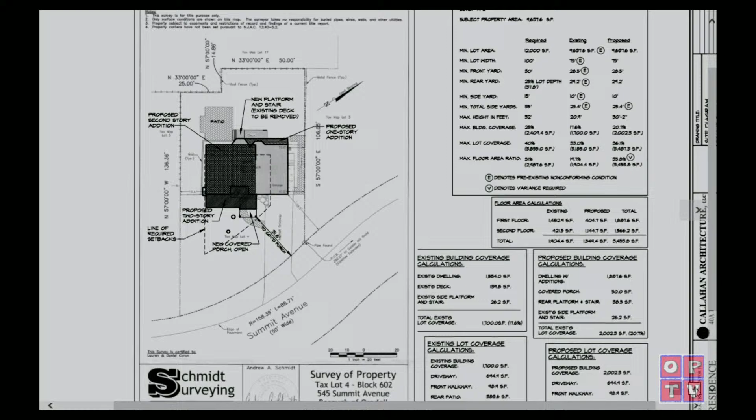The first, and probably most important, is that the lot is deficient in lot area. In the R2 zone, 12,000 square feet is required; this lot has 9,637 square feet. The existing lot is 75 feet wide, where 100 feet is the minimum lot width.

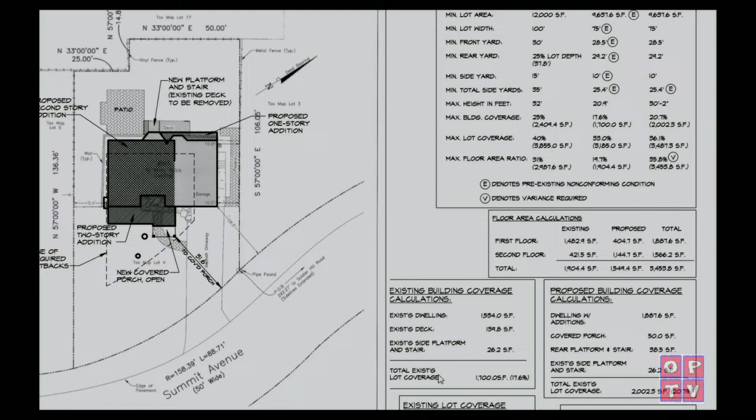There's a zoning chart on the A1 sheet of the submitted plans that flags all the existing nonconformities. The existing front yard setback is 28.5 feet, where 30 feet is the minimum required. The existing rear setback is 29.2 feet, where 37.8 is required. There's also side yard setback issues due to the lot width deficiency — the existing side yard is 10 feet where 15 feet is the minimum required, and the combined side yard is 25.4 feet where 35 feet is the minimum required combined side yard.

With that in mind, what we're trying to do is add on to this to make it a little more of a livable setup. Right now there are 2 bedrooms on the first floor, and on the second floor is a master suite. We're trying to provide a new second floor that has all 4 bedrooms with 2 bathrooms.

On the plans submitted, the A1 sheet has a site diagram showing where we are going, with the hatched-in portion showing the proposed second-story addition. To make this work and make the first floor more livable, we're going to pull the first floor towards the street about 8 feet, and that's going to be a 2-story addition at that part.

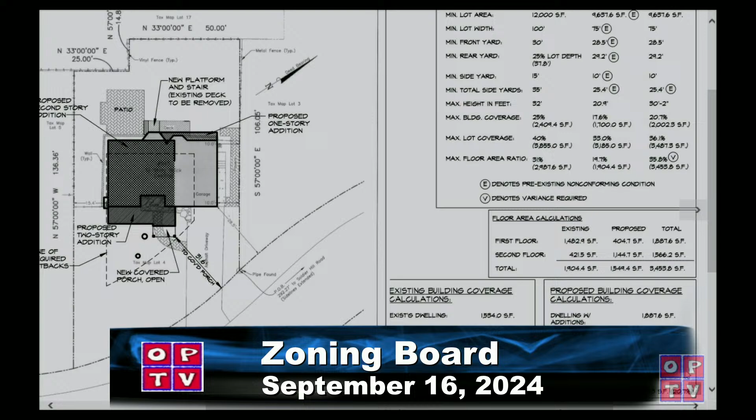On the site diagram, I have a dashed line that indicates where the required setbacks are. You can see that really the only place to build on this lot is in front of the existing house. So that's what we're proposing to do, and create a new facade and a new front to this house.

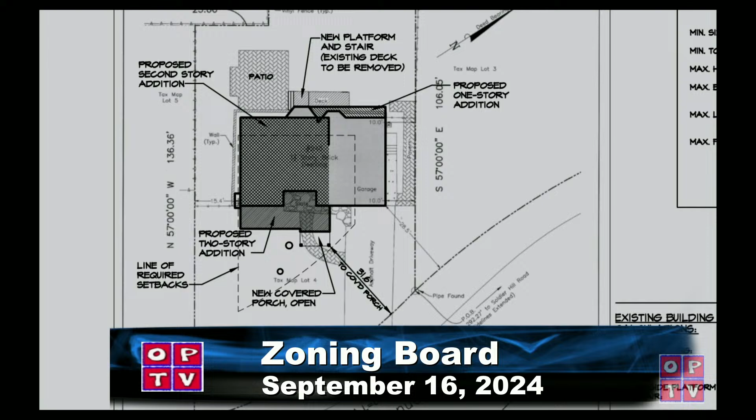Going through the plans, the A2 sheet shows the foundation plan — this house is on a crawl space. There was a small subsequent addition in the top right corner of A2, a previous addition that dug out a full basement behind the garage slab, but the balance of the house is on a crawl space, and the new addition would also be on a crawl space.

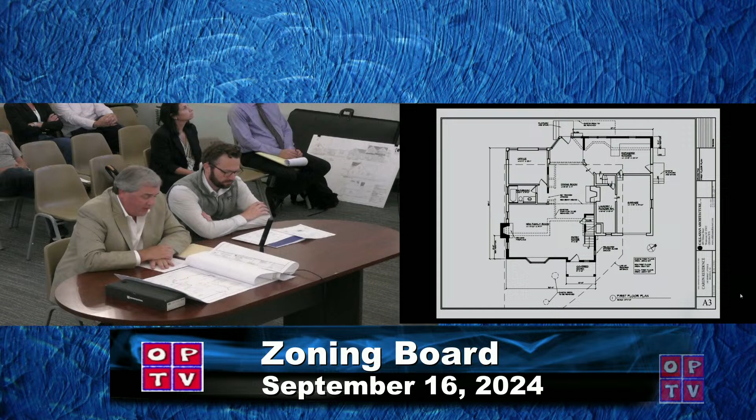A3 has the first floor plan. All the hatched walls are new. We'd be converting one of the rear bedrooms to an office space, taking out a closet, and opening up the first floor plan a bit more. Also, one deficiency in the house is the width of the existing kitchen, so one of the proposed additions is to add a little less than 4 feet off the back of the house to make the kitchen more usable and useful.

A4 is the proposed second floor plan. It shows the existing layout on the right-hand side, the rec room — that's the existing master suite right now, if you will. There's a back stair that leads to the kitchen, so the flow is not great. Part of this addition, and part of the square footage we're asking for, is to build a new stair in the new part to connect the new first floor to the new second floor.

A5 and A6 are the exterior elevations. The house is brick front now. The right side of it that is brick would maintain the brick, and we'd like to get some brick wainscot, hopefully using the brick from demo, to adorn the front facade as well. Those are the two exterior elevations, A5 and A6.

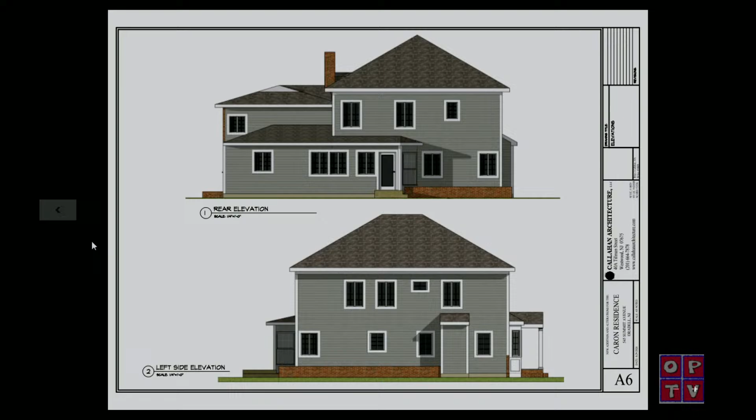So we are seeking the following variances. We have one for minimum combined side yards, 35 feet is required, and 25.4 is existing and proposed, so we're not increasing that degree of nonconformity. And the maximum floor area ratio is the second variance. In this zone, 31% is the maximum allowable, and we are proposing an FAR of 35.8%.

If this were a conforming lot of 12,000 square feet, that square footage we're proposing would equate to about 28.7% FAR. So in my professional opinion, it's a square footage that in this zone could easily occur on neighboring homes.

To sum it up, strict application of the zone provisions would result in practical difficulties in this case, in that the proposed second floor would have to be brought in, and we'd have to provide structure for that new second floor as opposed to building on the existing exterior wall. I'm talking specifically about the rear wall and rear yard setback. In addition, I think we're keeping within the scale of the two-story structures in the neighborhood and surrounding zone.

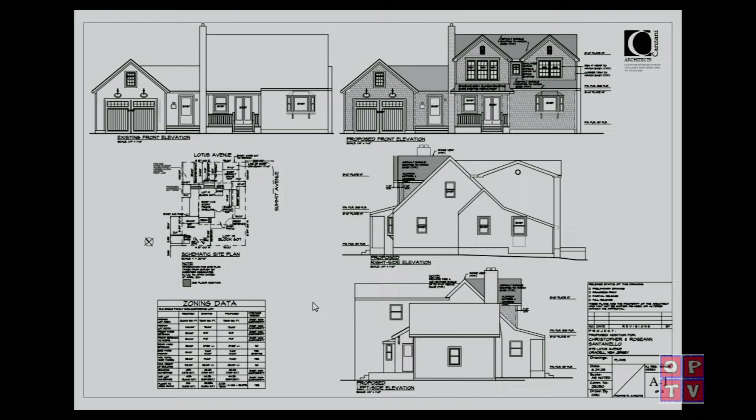One noticeably outdated feature, however, is the Cape Cod-style roofline that faces the street, showing a visually imbalanced ratio of roof to house. It also serves to create old-fashioned sloped ceilings encroaching on the 2 front bedrooms. We're proposing to add a dormer to the front of our house to modernize and add usability to our 2 front bedrooms. It will also update the appearance of the house with the front-facing gable look that is consistent with both new construction styles and renovations in the area. The variances we request to perform this addition are all entirely within the pre-existing, non-conforming boundaries of the house with regard to side yard setback, total side yard setback, front setback, building coverage, and impervious coverage. A slight exacerbation of our existing floor area ratio nonconformity would occur due to the leveling and squaring of the front bedroom ceilings and walls by the dormer.

Totaling only 78 square feet of additional space, the house will be no wider, deeper, or taller than it currently is, remaining entirely within its existing footprint on the property. The hardship created by an undersized lot in the R2 zone at 7,500 square feet, where 12,000 square feet is required, is entirely responsible for the need for these variances. And we believe the current footprint of the house and similar neighborhood homes show that the property can support these variances with no detriment to the area and no negative criteria.

During the careful planning of this request, we considered other alternatives. However, the next best options proved to be unfeasible. Building out over the garage to provide less cramped space in the bedrooms created a far greater FAR variance and much larger construction disturbance. And adding dog-ear style dormers actually diminished usability in the 2 front bedrooms because of the disturbance in contiguous wall space with no relief of the low ceilings. We feel this attractive dormer is the best option for ourselves and future owners of the home. The change would be in harmony with the neighborhood and add both value and visual appeal.

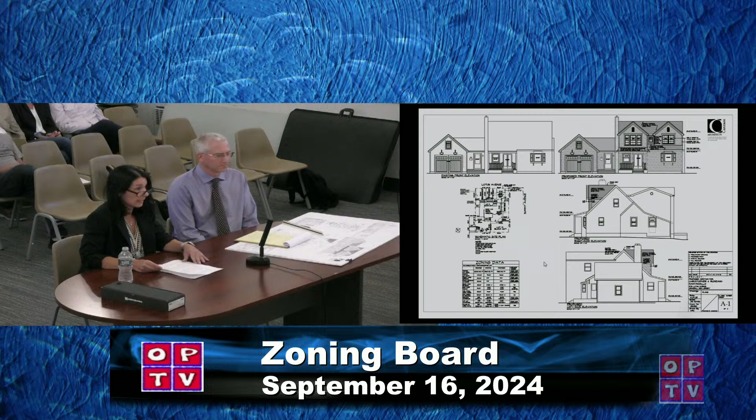With that, I'll ask our architect, Kevin Spink of Kanzani Architects, to cover specifics of the project and answer any technical questions you might have. Thank you. I believe she summed up the whole application. But you're going to bill her anyway.

I know, right? I'm here, I might as well do something.

Okay, just walking through the zoning on this. As we stated, it is an R2 single-family zone. It is known as 875 Lotus Ave, Lot 19, Block 607.

Currently, the existing property is undersized. It is 7,500 square feet, where 12,000 is required. The minimum lot width is supposed to be 100 feet, where we only have 75, so we're much narrower than what we were supposed to be.

Currently, the front yard setback measured - I just want to make sure I get it to the right spot - we are measuring 21.8 feet at the front yard, and that is to the front porch itself currently, where 30 feet is required.

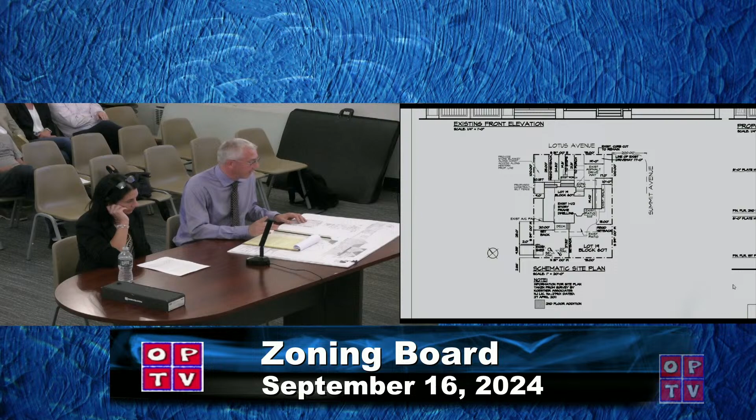The side yard setbacks - just making sure I get this right - where 15 is required, we have 9 on one side, and we have 10 on the other. So our total is 19 feet, where the total combined is supposed to be 35. So we're much smaller than what is supposed to be.

These are all pre-existing conditions. The height of the house is currently about 24 feet 9 inches, somewhere in there. We are maintaining that height as what it will be.

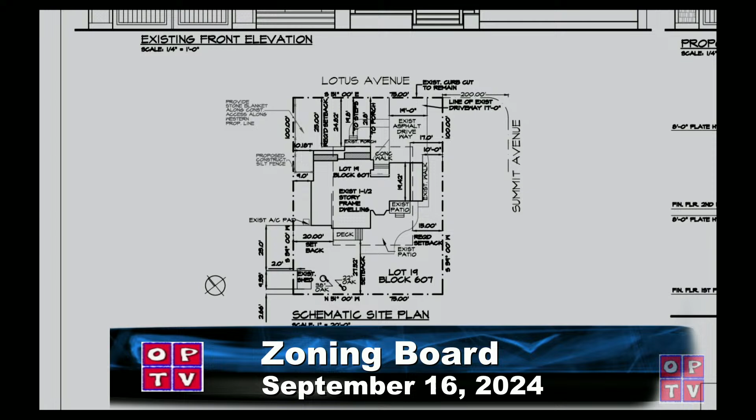The building coverage is supposed to be 25%. We are at 26.2 currently. The impervious coverage is 40% required, and we are at 44.2%. And the FAR is required to be 31%. We are at 35.33%.

As stated, what we're looking to do is just improve the front aesthetic quality of the house by adding 2 dormers to the front, basically, and pulling the 2 rooms out. We're only pulling them out 3 foot, or 2 foot 11 and a half and 3 foot 1 respectively on the 2 sides, and it creates that new look on the elevation. You can see the 2 gables, and it really accentuates the front and improves the overall aesthetic quality.

Overall, those 2 dormers are only adding 78 total square feet to the house. We are aligning them up to the side of the house that is currently existing, so our setbacks will remain at 9 feet, but we are technically exacerbating it by adding a second story over the top of it.

The same thing goes with the 2 side yard setback requirements. We are still identical to what is currently there. It's just exacerbating it because we are adding that second portion over the second floor.

Front yard, we are not increasing the front yard. We are actually stepping it back from the front of the current house. So we are respectively 1.5 feet and 2.5 feet back from where the current front of the house is.

So overall, it is the FAR. The FAR is going from 35.3% to 36.37%. We feel that the overall aesthetic quality is a significant improvement. The benefits outweigh the detriment of this, and we feel that this de minimis addition would be in kind with the neighborhood itself.

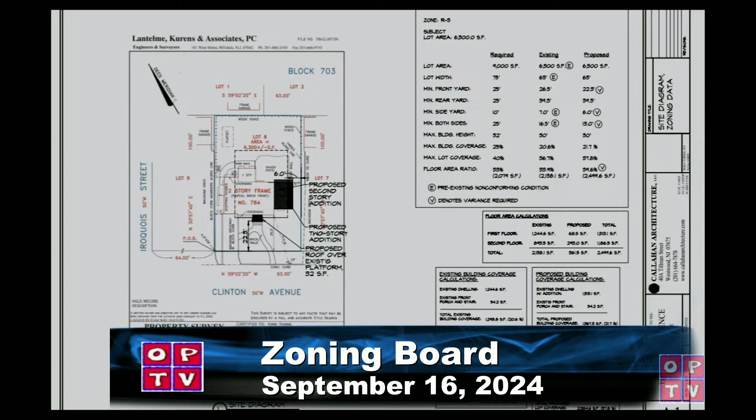We are also proposing a covered entry. There is an existing masonry platform and stair at the front door, and that is currently basically non-conforming - it's only 22.3 feet from the front property line, where 25 feet is the minimum required. We're proposing just to put columns and a roof over that. It would be open, but it would just be a covered space at the front door.

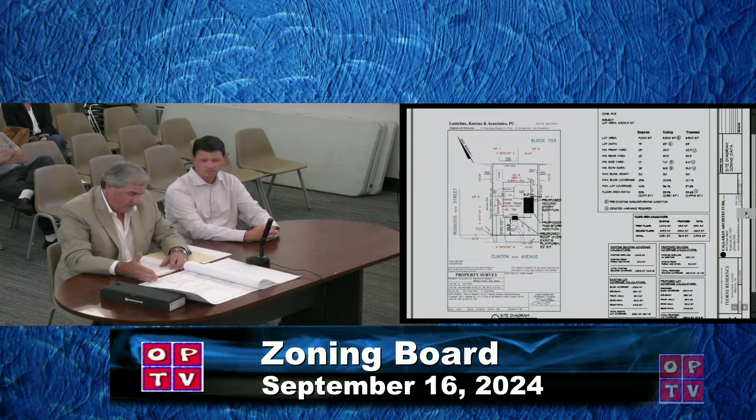So let me go through the drawings again, if I may. A2 is the first floor plan. This area on the right side is currently on a crawl space, and the proposed addition would be on a crawl space. So we're looking just to add 3 feet 6 inches, which is the hatched part on the right side of A2. That sort of makes that family room a little bit more usable - it's a little bit on the narrow and long side now.

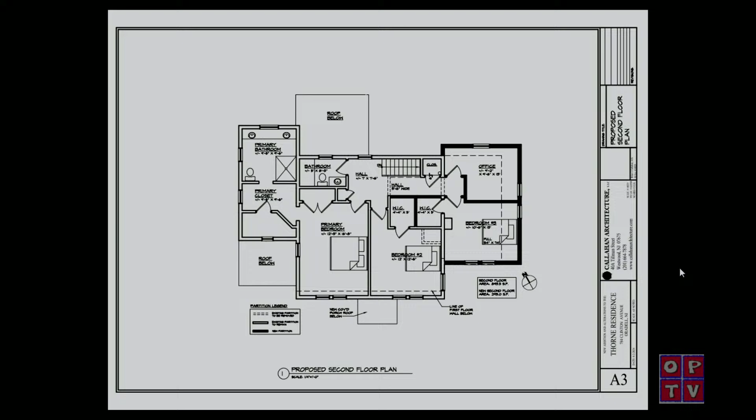And you can see at the bottom of the page, the 2 columns that are colored in would be the new covered porch posts. A3 is the 2nd floor plan. So currently, where it says hall and those 2 closets below it, that is a small 3rd bedroom on that floor. We sort of would carve that up as a hallway to enter the new addition, which would consist of, on the 2nd floor, a small office and a small bedroom.

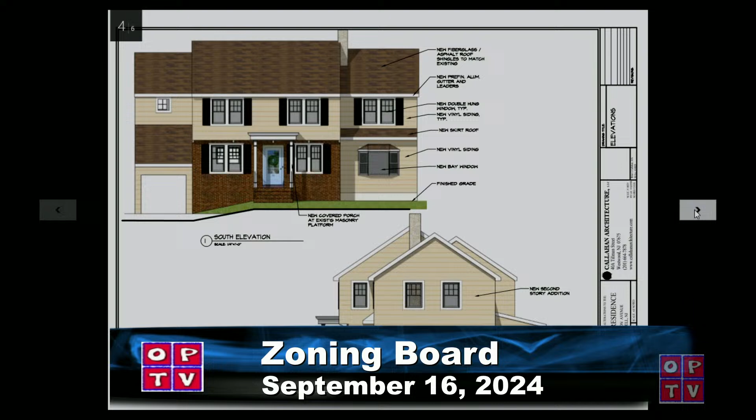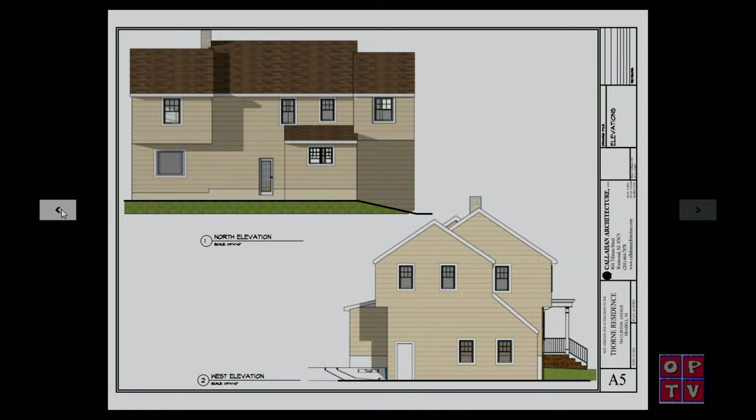A4 and the 2nd floor total square footage that we're proposing is under 300 square feet, 293 square feet. A4 depicts two of the exterior elevations, the south and the east. A5 shows the other two elevations, and we also included A6, which has some perspective views of the 3D model.

So with that, we are seeking the following variances. We need a front yard setback variance for our covered porch. Again, the structure is there; we would just be putting posts and a roof on it.

We're also looking for a variance for a side yard setback. The minimum is 10, and we are proposing 6. Again, the lot width is only 63 feet.

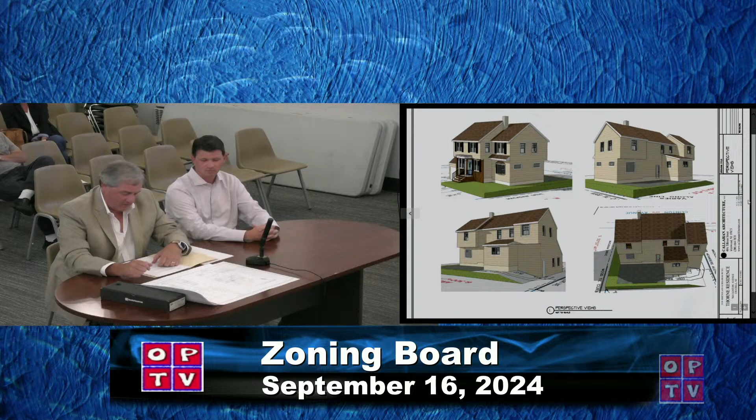Minimum of both side yards combined is another variance we'd be going for. 25 feet is required. Currently it's 16.5, and we're looking for 13 as our proposed combined side yard.

And finally, the FAR, which has been popular tonight - it's 33%, which is what is permitted in this particular zone. We were proposing 39.6. Again, if this were a conforming lot, this FAR would be 27.7%. Or to put it another way, you could have 2,970 square feet of floor area in this zone. We're proposing 470 square feet less than that.

If strict application of the ordinance was required here, we really wouldn't be able to add on to anything. Again, in my opinion, it's keeping with the two-story scale of the surrounding structures in the neighborhood. And even though we are asking for relief in floor area, we are conforming with, and we are under, the maximum allowable building coverage and under the maximum allowable lot coverage. So for these reasons, I would ask for the granting of the variance.

Okay. Well, this is a FAR case, so it's a... Yes, D4. So we need 5 again - 5 out of 7. Once you've heard what we have to say, you'll just tell me whether you want us to proceed to a vote.

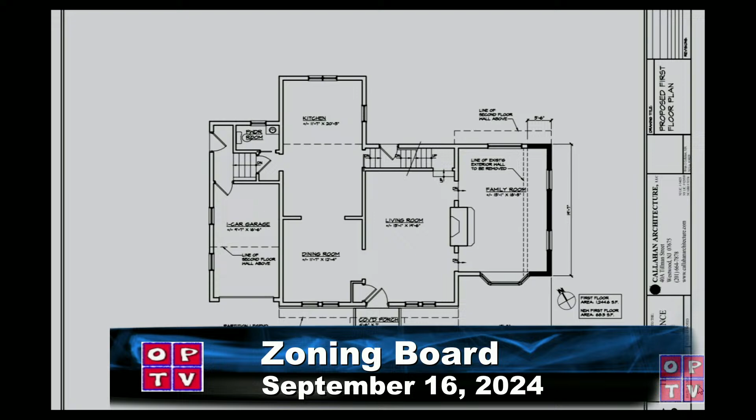Yep, so right now, the layout of the house - we can see on the A2 sheet, there's a stair that goes along the back wall of the house, sort of left to right across the page here. Anything in the back there, that stair kind of bifurcates any flow in terms of spaces that we might have back there that might be internal buildable spaces. So our thought was there already is a family room here. We thought a more economical solution, albeit we're here, would be to expand that family room and minimize our footprint expansion rather than build another space behind there.

Any other questions?

Any member of the public have any questions? Not seeing a show of hands, I'll close the meeting to the public.

Given the lot and all that, this seems to cry out for what you're doing now. I remember when Oradell used to be called the family town. We had it on signs and everything, remember? Well, if you want a family, you have to have what you're proposing. So the size of the property, the needs one expects in the 21st century, it cries out for this. That's my opinion on that.

Anybody on the board have anything else they want to add? Well said, Chairman. Say that again? I said well said, Chairman. Thank you. Yes, I get paid by the word.

And the front exterior balances out, the way it's designed. Makes the front of the house look much nicer. It's a very attractive design.

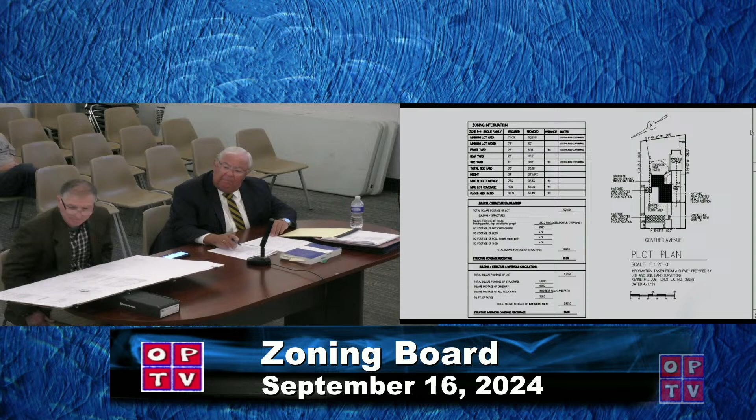So as far as the non-conforming setbacks are concerned, let's talk about the current encroachment to the side yard setback. It's at 3.82, that is correct. And based upon what you're proposing in that back corner, that will remain that way? That's correct. In connection with the front yard setback, this is a home built many years ago, very close to the road, as homes were built back in the day, correct?

Yes, correct. So we have a front yard setback encroachment at 6.38 feet. And at this point, are we exacerbating that condition? We are not exacerbating, no.

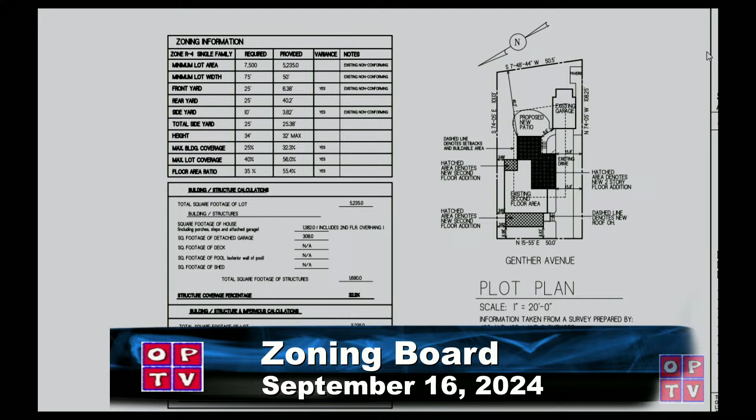Going to the architectural aspect of it, that front elevation, what is the streetscape going to look like based upon what you're proposing? Currently, the home has a sort of cape feel. We're looking to expand and go over the front portion of the house, create a gable with horizontal siding, very much in context with the existing fabric of the block. There are about 2 houses to the right, 3 houses to the left, all similar in feel in terms of roof lines and materials. So we're looking to conform architecturally and add some curb appeal to the front of our building. So the entire outside facade, roofing, eaves, windows, et cetera, would all be modified and brought up to today's standards? That is correct, yes.

Safety windows on the second floor? Yes, egress windows, of course, yes.

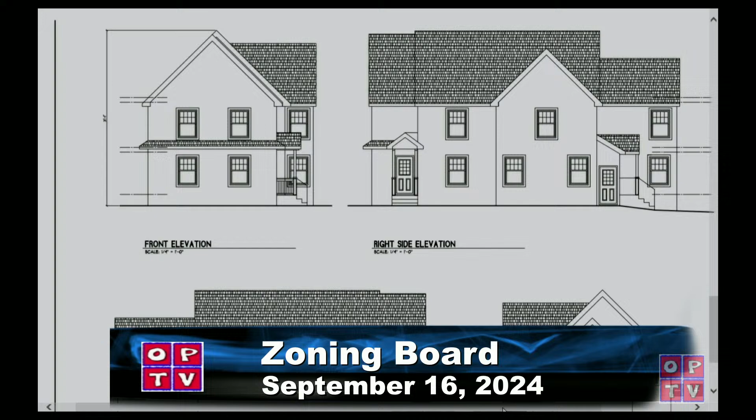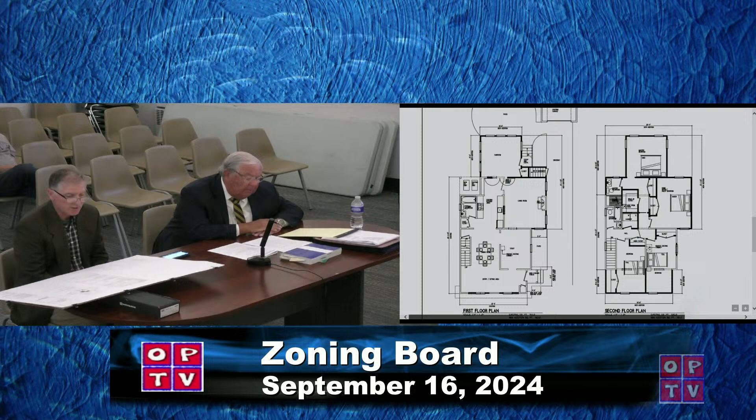In connection with the other nonconformities, we currently have a building coverage issue. What is it that we're proposing? The building coverage required is 25%, and we're proposing 32.3%, based on the additional coverage for the addition. Now, one of the things particular with this substandard lot is that we also have quite a bit of impervious coverage, isn't that correct? It is, because of the undersized lot. 40% is the requirement, and we're at 56.0%. Part of that is also recognized that over 600 square feet pertains to a driveway to get to the detached garage to the rear, is that correct? That is correct, yes.

In connection with the FAR that we're proposing, explain what's there now and what is being proposed. Currently, the requirement is 35%. The home is at 23.6%. With the addition, we're going up to 55.4%. I just want to make the point that the building coverage, lot coverage, and floor area ratio, if in fact we had the required lot size, would all come under the requirements, so we wouldn't have to be here asking for those variances.

The final variance we're seeking is that we have a substandard distance between the proposed addition and the accessory structure of the garage, isn't that correct? That is correct. 10 feet is required, and we are at 8.6. Okay, and from an architectural and fire safety standpoint, can that be accommodated in that distance? 100%, 8.6 is a comfortable area to walk through.

Proportionally and aesthetically, on this small of a lot, I think it's not going to appear that tight in terms of that walk-through space. But 8.6 feet is about 2.5 times the standard minimum width for a hallway, that kind of thing.

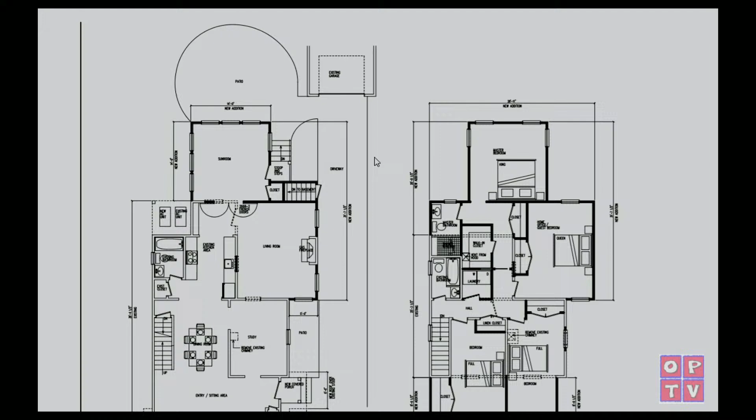Now, you've been over to the site, obviously, you've been in the neighborhood itself. Yes. In your professional opinion, would you believe that the structure overall as proposed would be in keeping with the neighborhood scheme and not out of proportion with other properties in that area?

Yes, 100%. Again, similar roof lines, similar materials, similar window styles, so we would definitely be conforming with the context of the immediate block. One of the things that's always a concern from a planning perspective when seeking side yard or front yard variances is the height of the building and the overall imposing look of a house if it's too high.

Well, what are we proposing here? So we are proposing 31.4, I believe, 32-foot max, where 34 is the required, so we'll be a couple feet under that.

And as far as the rear is concerned, as far as the look from the rear, is it correct to say we have a rear setback line that's greater than what's required? Yes, it's at 40.2 back to the building, whereas 25 is the requirement.

And one of the other concerns with FAR and building coverage, besides aesthetics which you already testified to, is that it would not overburden the lot, for instance from a drainage perspective. So it's correct to say there's no drainage improvements per se on this old house right now, but we will meet all the required standards for drainage so it will not be exacerbated. Whatever the requirements are when we go for our building permits, whether it's seepage pit design to take on the additional water hitting these new roof lines, we're going to be conforming.

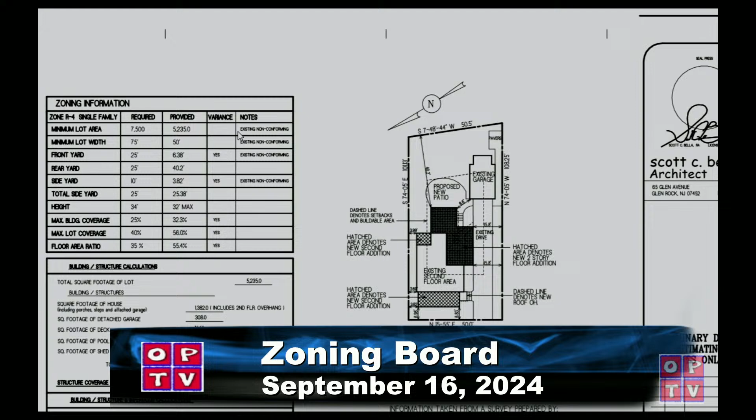It was my sense in listening to the testimony that this lot, given its size, was basically zoned into disuse. And if you tried to put anything of a livable nature on here, you'd have to come up with all of these variances. Would you agree with that? 100%, yes. All said and done, the home in the end is only a little over 2,300 square foot home.

Thank you. Any member of the public have any questions? Not seeing a show of hands, I will close the meeting to the public. We'll go through and give you our thoughts, and then you can decide if you want us to bring it to a vote.

I'll start. I think this cries out for approval. As I said, the property was zoned into disuse. If you want to do anything, you're before the board for variances. I don't see how we could say no to something that's required for livability. That's frankly as strong as I can make it.

And so we'll start down here. Yeah, I mean, I agree. At a lot size of just over 5,000 square feet, there's not much that you can really work with there. Again, you kept it down. You could try to push the height a little bit, so I think there was some consideration to not try to max it out as much as you can. So, yeah, I'd like to hear the rest.

Yeah, I would agree. This is a really challenging piece of property with the pre-existing nonconformities, and I think you've done a pretty remarkable job managing to give value to the house, maintaining the look and feel of houses in the neighborhood without going too big or too far, and expanding too much onto the lot. I think you kind of had your work cut out for you here, but I like the design of the house, and it strikes the proper balance. I don't think you went too far with making it bigger than the lot can handle.